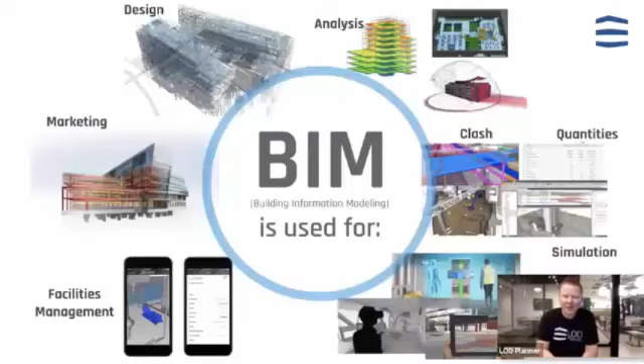Here we see a few of them. You might create it for visualization, for some kind of analysis or clash detection or quantification. You might use it to walk the owner through the building, or for the owner to manage and maintain the building. Or you might just use it as a pretty picture to render and share with others to see what the building is going to look like before you build it. So there's a lot of uses for models. But we ask ourselves, what is BIM? Is this BIM, Adnan, is this BIM?

Maybe. Exactly, it's actually just a model. So this model, is it the model that we asked for? Is it the model that's going to be useful? Can that model fulfill the uses, the BIM uses, or the model uses that we were planning for? I don't know, but let's take a step forward.

Is this one BIM? So was the first one BIM? Or is this BIM? It's a model, it's just a model. Yeah, but it might be the one that people would like.

So would we like more elements in the model? Is there data attached to these models? Who's responsible for these? Is there handover information that's required at the end of that?

And then we ask ourselves, well, if this isn't BIM, what about this? And really all we're doing is putting more and more elements into the building. They're all great models and they could be used for one of those different purposes.

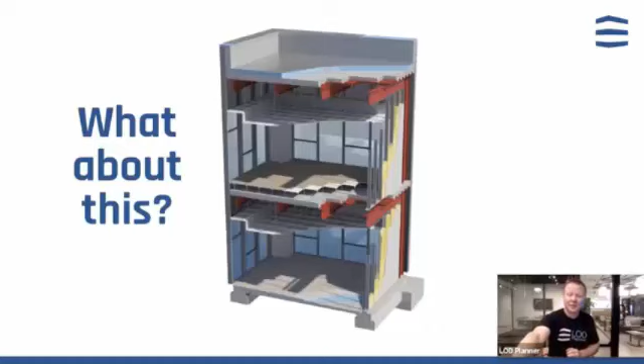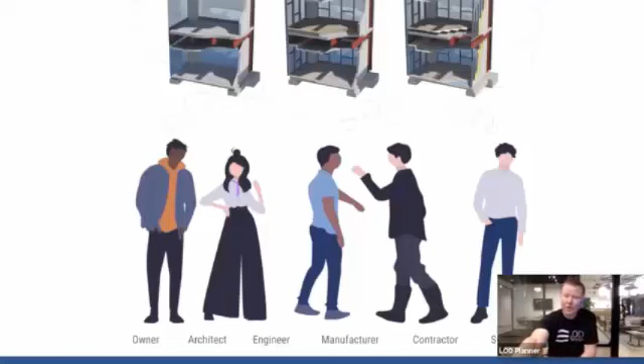So we have to agree on what BIM should be before we go and spend a lot of time doing it, because in our industry we're trying to save money by using this new method of creating better outputs and being more efficient. Having good communication can avoid these costly miscommunications and misalignments that can cost a lot of money in the industry.

So in our tool set as a BIM manager, I'm sure you've heard a lot about all of these tools - the authoring, analysis, and use tools - and they are fantastic. They are really, really great tools, but our industry has neglected planning for these tools, for this workflow and understanding.

And in our industry, we've currently used project management tools that are generally inefficient and disconnected. One of the things that we do at LOD Planner is make that highly efficient and much more connected to the workflow. So I can talk and walk through these.

I'm not going to focus too much on the tool specifically, but what we really need is a dedicated workflow to help BIM managers become more efficient.

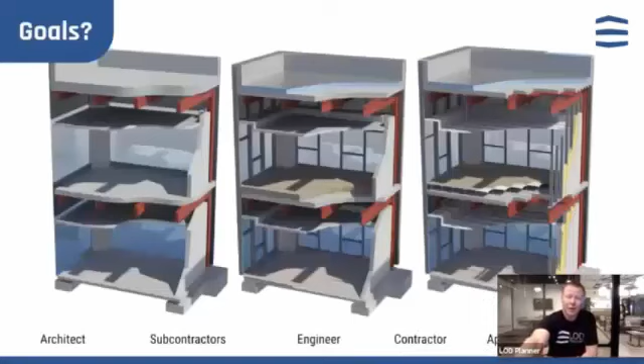So the second part we're talking about is scoping, and how do you agree on - remember the three models that we had on the screen - how do we agree on which model we should be achieving? Which one is the right model to be using? We looked at the one on the left-hand side all the way through to the one on the right-hand side, and somewhere in between might be the right model that we need.

But how do we define all of the things that we need? There are many different parts to the model. As Adnan says, was the first one a BIM? Did it have the right geometry? Did it have the geometry at the level of reliability? Was it at the right level of accuracy? Do we have the right information attached to it? And what was the real purpose behind creating it in the first place?

So all of these different parts of that workflow and all of those different parts of the purpose of creating a model need to be defined, and it's really pretty difficult. As a BIM manager, this is your job though. Your job is first of all to define all of these for the whole scope of the project, and then to manage, track, and control them so that they get delivered at the right time by the right person. And it's pretty tough.

It's really tough, and unfortunately, if you haven't got those things in place, we end up having missing BIM, where sometimes you are halfway through a project and realize that nobody modeled the light fitting. Or you end up with too much BIM - it could be that 7 different people modeled the light fitting: the architect early on, the owner had their own object, maybe the interior designer, the electrical engineer, and the contractor. They all created a light fixture, and that's too much BIM. So you can go from either end - either not enough, where you have scope gaps in the model, or all the way to the other side with more than one person doing the same thing, which is waste.

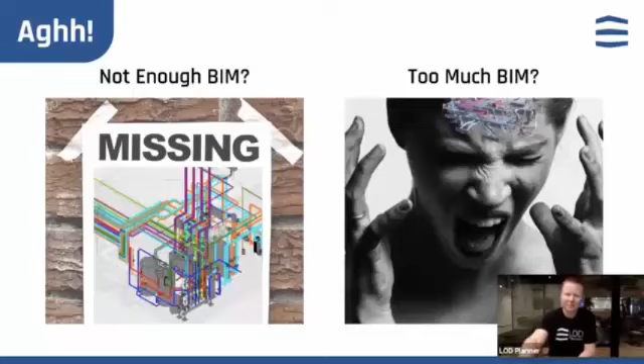So the third part we wanted to focus on was being able to track and control those things. Once you've created that scope that understands exactly who does what, at what point in time, how much detail, how much geometry, how much information, how accurate - you then need to be able to track and control those things. And as you do, you might find yourself spending time in long and challenging coordination meetings as a BIM manager. A virtual show of hands - I'm sure nobody will say they enjoy spending 3 hours in a coordination meeting.

So we see people that resolve those challenges by routing around other elements. If there was a clash and the pipe had to route around this cable tray, we would see that as being a resolved clash, but not necessarily in the right way, because it's a lot more expensive to put the additional bends in, maybe the welds, maybe more supports and more pipe than it would be to just bend the cable tray around the pipe.

This is a really important part of the BIM management workflow. After you've defined the right scope, you need to then manage that workflow to completion in the most efficient way possible. So what if we could avoid those clashes before they occurred? What if we could run a clash avoidance workflow? We've covered BIM execution planning, all about process. We've covered scoping, all about who does what when. But the clash avoidance part is about getting it done and achieving the right sequence of events.

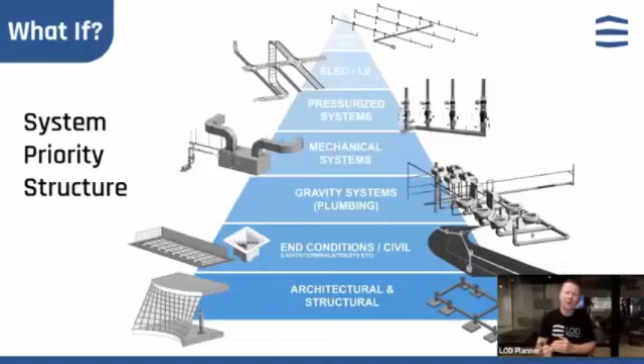One of the things as a BIM manager you have to think about is the system priority structure. How are you going to make sure that the right things get fixed in the model first, and then later on down the line, the other things that are more flexible or less costly to move around are later in that hierarchy. If you run this system priority structure, you'll see that the one on the left-hand side that was solving that clash achieved the result of 0 clashes, but it didn't achieve the most efficient output for the modeling, for the project. So the correct priority was that the pipe had priority and the cable tray was routed around it.

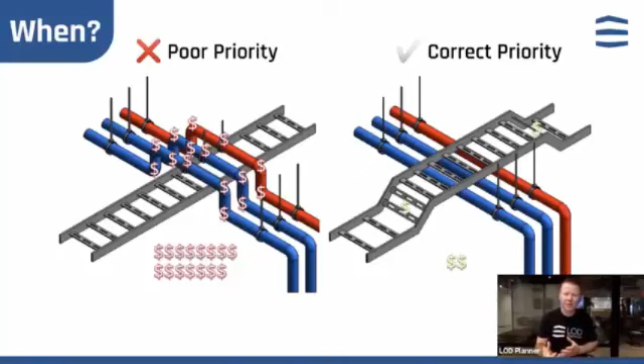As a BIM manager, you have to manage these teams that are creating models so that we can get the right outcome, and the solution is to be early and sequence and allow teams to know that that's going to be the case, so that the pipe will take priority and will have a better outcome as a result.

We actually had a case study where we had 2 teams, Team A and Team B. They went through a couple of different scenarios to test this theory of system priority, prioritizing certain things as a foundation before putting in others. The results were pretty astounding. When you ran that process of clash avoidance and the sequencing beforehand, having a very tactile session between the teams, we saw a 73% reduction in issues. Issues meaning clashes, problems that came up that could cause issues that were not necessarily clashes, but really required more time from the team to solve.

That was an amazing case study where we had 2 teams that were willing to spend their time running this analysis, and they actually got to swap, so both teams did both of the different methods, and that is the average of those results. What we saw was moving away from the traditional, very long phase-based design process to a smaller bite-sized set of milestones, starting the right trades at the right time and allowing them to have conversations to make sure they can prioritize systems and run clash avoidance.

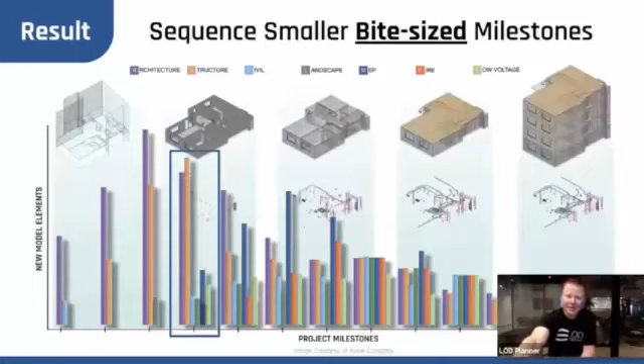If we look at each one of these milestones, we have to define the purpose, why we are doing it. As a BIM manager, we would be going through building that scope and understanding what those milestones were, whether they were design review type milestones, or am I building this model for a cost estimate? Am I building it for coordination, for handover? Then I'll build the scope that's required for the project as a whole.

I'll start to complete the grid to understand what elements I'm going to need for that purpose. For the cost estimation milestone, there'll be certain elements required for the ability to create a cost. For handover, we might need more or less elements. For coordination, we might need more or less elements. Being able to define that in a way that's granular enough for teams to manage and control is incredibly important. But then, to achieve this clash avoidance process, it's all about sequencing those elements.

So the best way to have feedback is when you're in person. We have video, which is great, but when you have somebody right next to you, you can have a conversation and achieve an understanding of: I need to put my ceiling in before you fix your light fixture at that elevation. Otherwise, if I put my ceiling in afterwards, you'll have to move your light fixture.

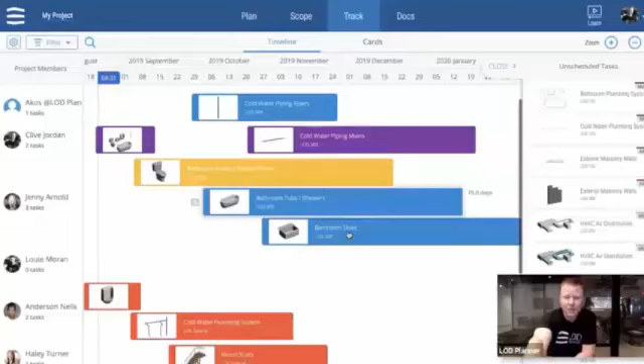Let me show you quickly in here. When we're in and start tracking, these tasks have certain date ranges you can pick for when they're going to be done. In card mode you can filter, say just for the architect's tasks or just for the contractor's tasks. These are the construction tasks, and you can mark which ones are in progress and which are ready for review—you can add more statuses if needed, then archive the tasks. So it's really about updating progress and statuses as completion occurs.

Hopefully that makes sense and helps—there are a lot of other tools that can be incorporated and work with LOD Planner and BIM when it comes to 3D management and 3D design. I think we've lost Adnan again. Any other questions before we move on?